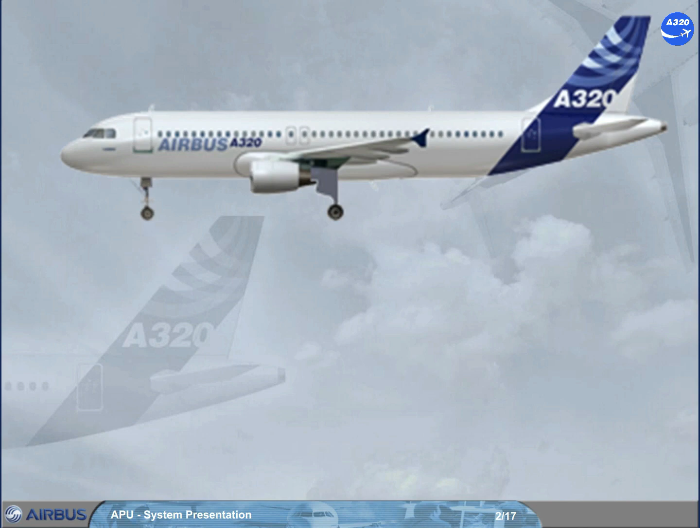The Auxiliary Power Unit, APU, is located in the unpressurized tail cone. It is a self-contained unit which can make the aircraft independent of external pneumatic and electrical power sources.

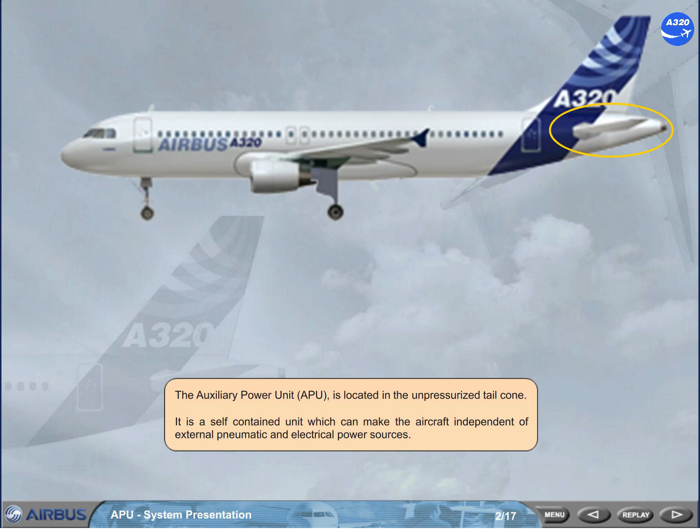The APU may be started using electrical power supplied by only the aircraft batteries, only the external power source, or the engine generator source.

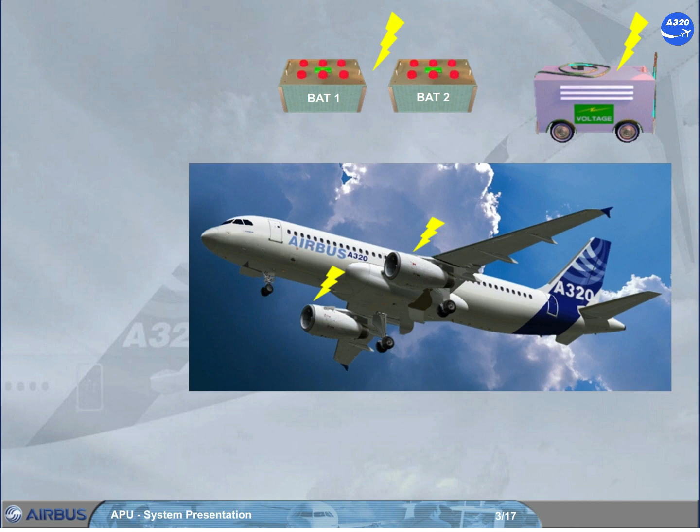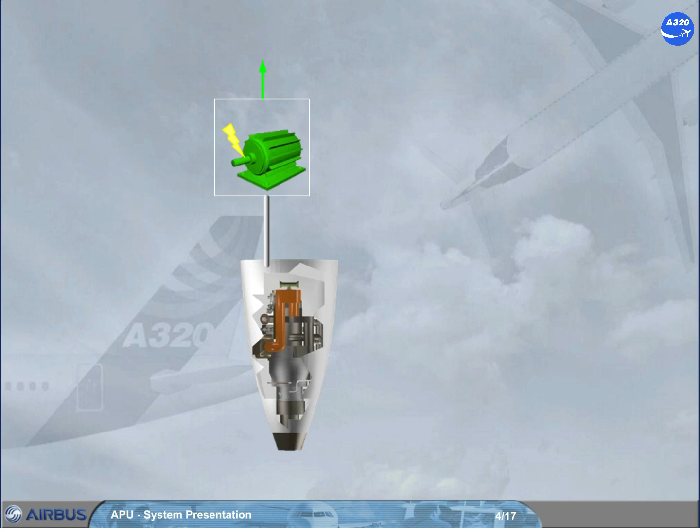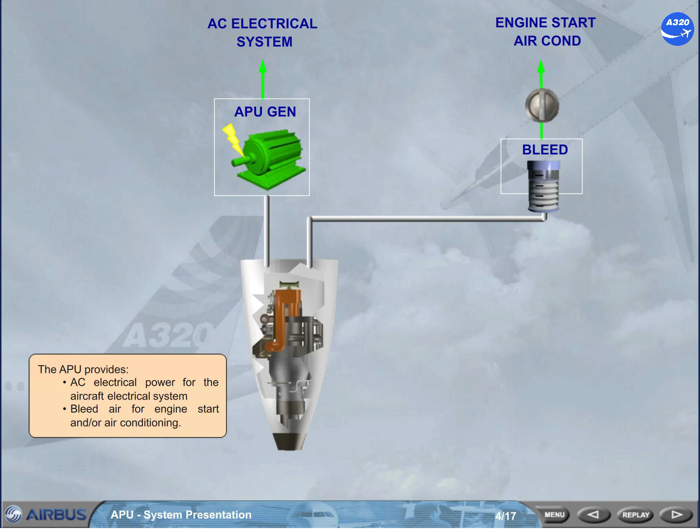The APU provides AC electrical power for the aircraft electrical system and bleed air for engine start and/or air conditioning. The APU has an electrically operated air intake flap, which, when opened, brings external air to its compressor inlet.

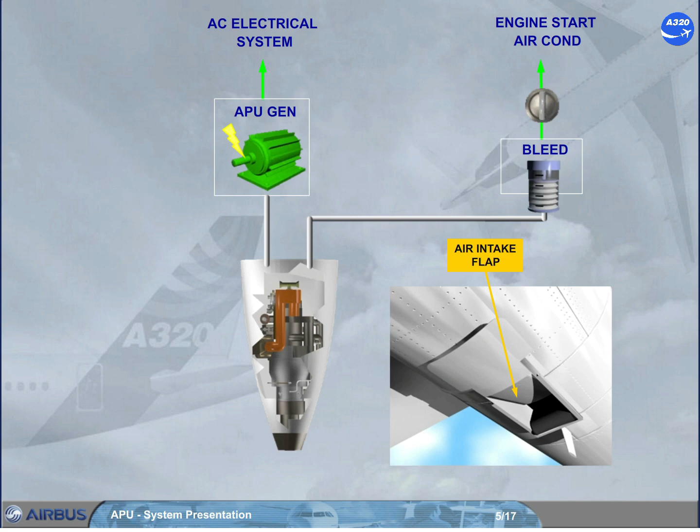Now we will see how information is presented to the pilots. In the cockpit, you can check the following APU parameters on the ECAM APU page: EGT and compressor speed, APU generator, APU bleed, and air intake flap position.

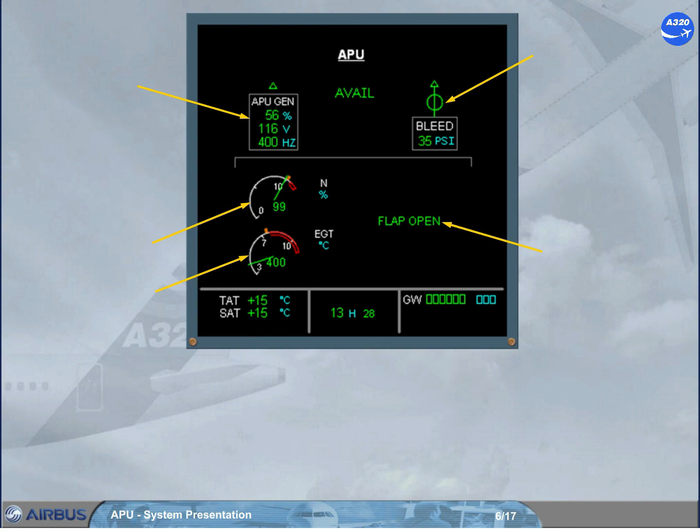Let's see the different controls that the pilots use to operate the APU. These controls are installed in various places on the overhead panel. The APU master switch and the start push button are installed on the APU control panel.

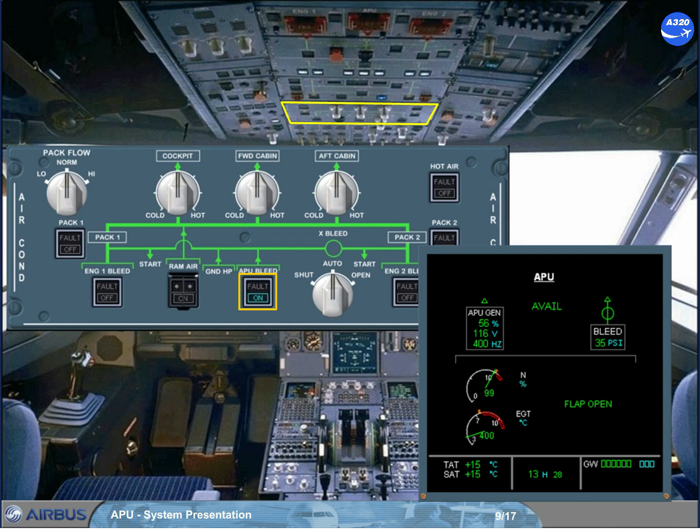The APU Gen push-button switch is located on the electrical panel and is used to control the APU generator. The APU bleed push-button switch is located on the air conditioning panel and controls the APU bleed system.

During the APU start sequence, at approximately 95% N speed, the APU avail memo is displayed on the engine warning display. This is to indicate that the APU parameters are normal and the APU is available to supply electrical power and bleed air. Note, the avail indication also appears in green on the ECAM APU page.

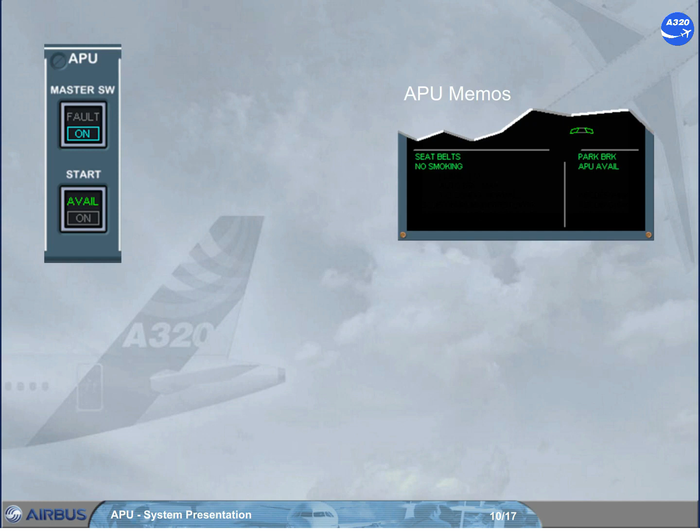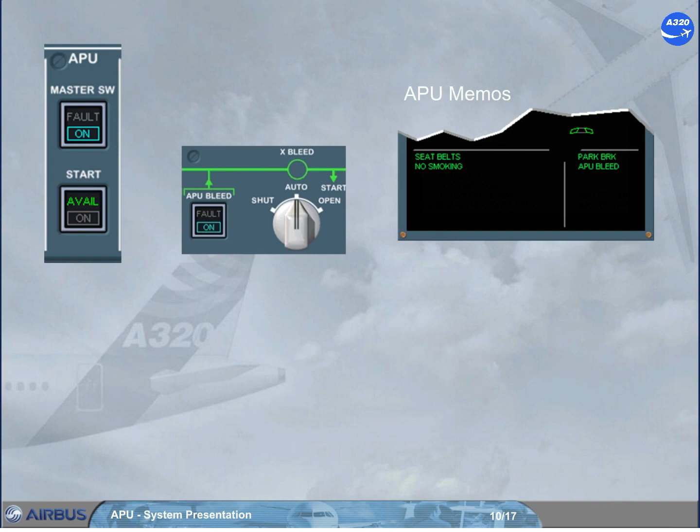On the start push button, the ON light goes off, and the green AVAIL light comes on. As soon as the APU bleed push button switch is set to on, the green APU bleed memo replaces the APU avail memo on the engine warning display. This is to indicate that the APU bleed valve is open with bleed air pressure available.

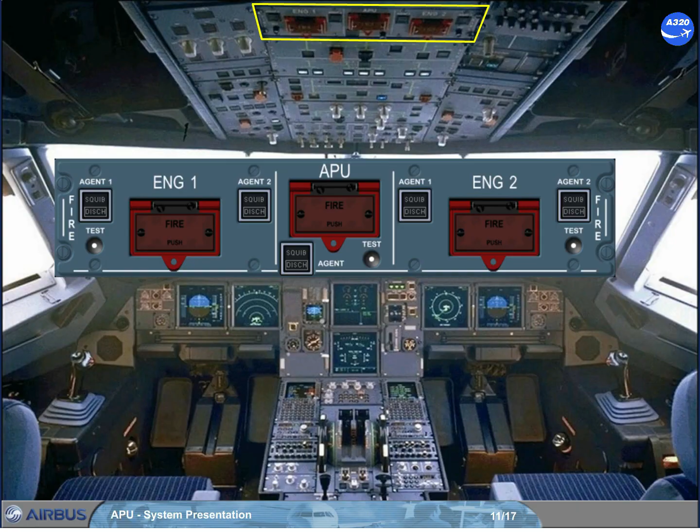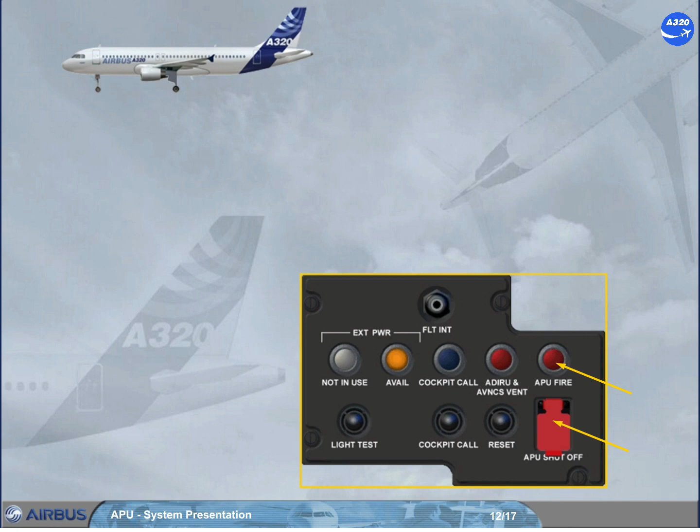APU fire controls are installed on the fire panel. For additional information, refer to the A320 Fire Protection chapter. There is also an APU shut-off push button and an associated APU fire warning light located on the external power panel. Refer to the A320 Fire Protection chapter. This panel is located in front of the nose gear bay.

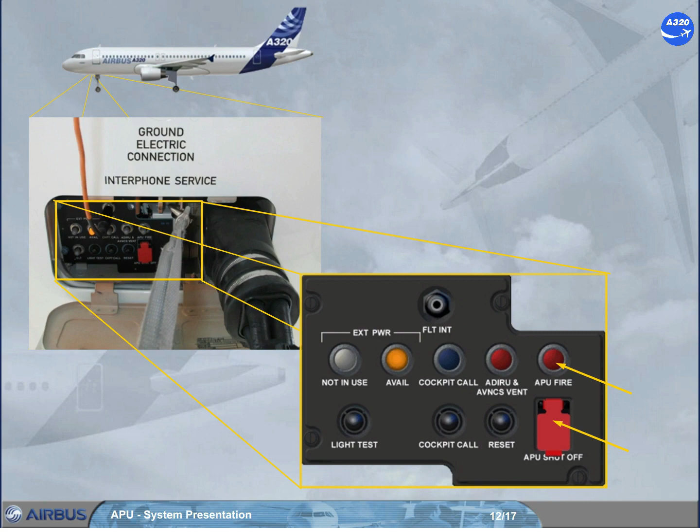The APU parameters are monitored by an electronic control box, ECB, which in turn controls the start, the operation, and the shutdown of the APU.

The ECB initiates a normal shutdown when the master switch is set to off. Note, according to the version, an APU cooldown period may be initiated after the closure of the APU bleed valve.

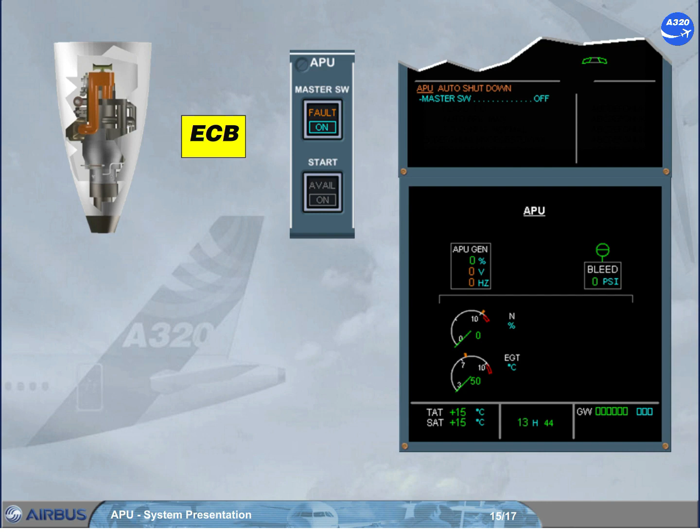The ECB initiates an auto shutdown when a monitored parameter is out of limits. For instance, a slow acceleration during start, or a fire has been detected on ground only. Note, the APU will stop immediately. The air intake flap will close 15 seconds after the APU speed is below 7%, or after liftoff, if the auto shutdown occurred before takeoff.

The ECB initiates an emergency shutdown when an APU fire push button is pushed on the APU fire panel, or an APU shut-off push button is used on the external power panel. Note, the APU will stop immediately.

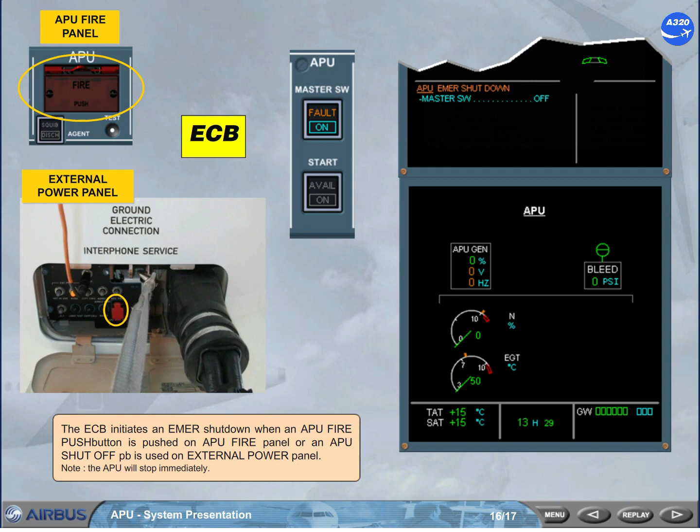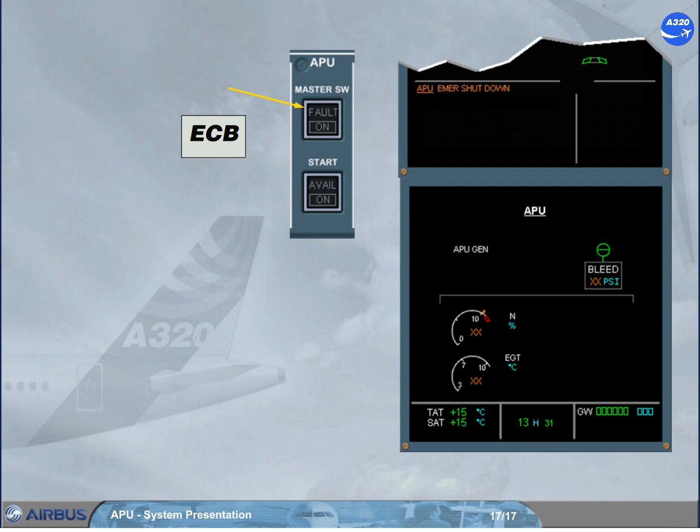Notice that, in both cases of shutdown, the ECAM action is to set the master switch to off, in order to switch off the fault light and to de-energize the ECB.